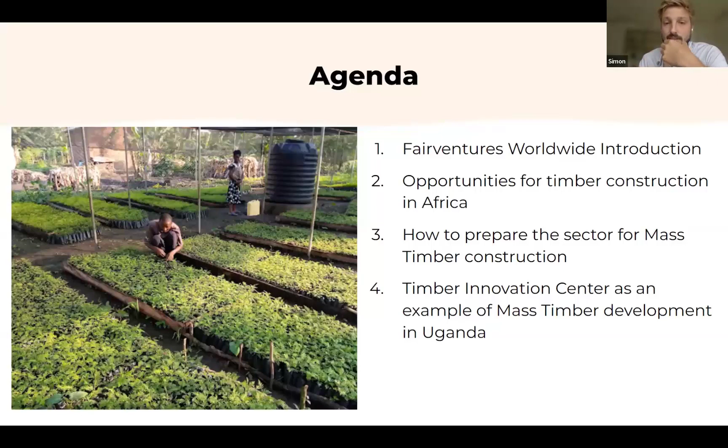I'll start with Fairventures Worldwide. We are an organization based in Germany. We are non-profit, working in reforestation projects and value chain development in Uganda and Indonesia. We have around 100 staff members across the 3 countries, and we are kind of a spin-off from Swisscontact. We have been operating since 2013.

Thank you for the introduction before. I'm Simon, the project manager for the timber value chain projects in Uganda. I'm based in Kampala. Right now I'm in Switzerland for leave, but I will be back in East Africa in about 2 weeks.

Most of us know the opportunities for timber construction, and I don't think I have to go too much into details here, just maybe as a repetition a bit.

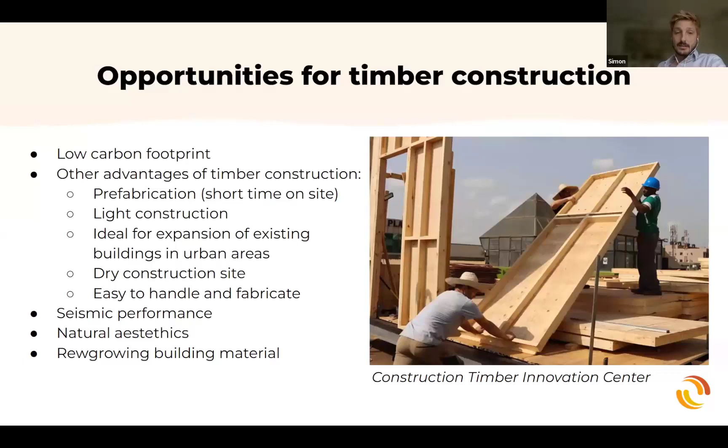We have a low carbon footprint. We have a lot of advantages like high prefabrication and short time on the construction site. It's ideal for building expansions in urban areas. We don't have water on the construction site, it's dry, and it's a material that's very easy to handle and fabricate on site. We have good seismic performance, which is also a big benefit. The natural aesthetics can be a benefit, and of course it's a regrowing building material, which is one of the most important parts of the benefits of timber construction.

What does that mean in the African context? As Hans already mentioned before, we have a lot of sustainably managed forests in Africa. I'm more focused on the East African region, but I'm sure it's basically similar in Western regions too. Timber construction has big potential for the economic growth and development of a region or country.

It's an advantage when we can source building materials locally, and we don't have to import expensive steel beams or concrete or cement from far away, from abroad, with high transportation costs. It would be good to source it as locally as possible.

Timber can also be a material for affordable building solutions, not only but definitely a part of it, and can also help address the high urbanization and population growth we have in the region, and the lack of housing we will face in the next couple of years.

When we use timber more in construction, the value of the timber will automatically increase, especially when it comes to high value products like mass timber products such as glulam or CLT. We can add value, which makes it more interesting for tree growers to plant more trees, which is also a big advantage. Africa, in general, has a big potential for global exports as well, whether as sawn timber or as a mass timber product, it has big potential for export to the global world.

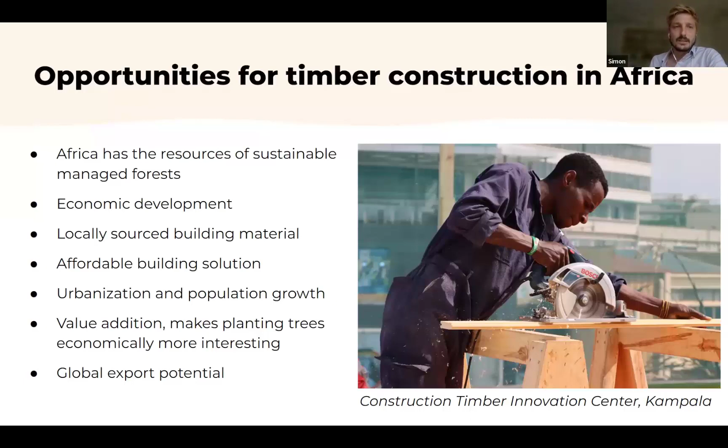As Hans already mentioned before, I think we have a lot of different steps or topics where I see we definitely have to work on, and where I see a lack of the standard we have at the moment in East Africa. One thing is we have to prepare the sector in these different topics.

We have to have timber from sustainable forests - that one I would say we can guarantee. Then we have to have quality assurance, which is a very important topic, because without good quality timber we will never produce any mass timber products. And then, of course, it needs the industry, it needs the production facilities for products like glulam or CLT locally. And the most important part, which Hans also mentioned before, is standards and norms.

We need to have national or regional regulations and standards for the different steps: for the sawmills to grade and sort the timber correctly, for the production lines, and also for the architects and engineers who are designing and calculating, dimensioning the buildings. They need standards which are accepted by the authorities and the government to build with timber.

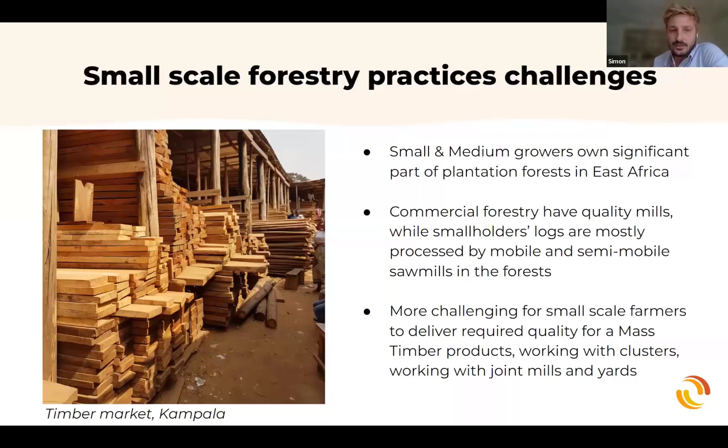To create or produce a proper raw material for mass timber products. But this can also be solved with clusters or joint mills where the smallholder farmers can access and join forces to increase the quality of the timber from smallholder farmers.

Then we have to plant the right species, and there we have criteria from the forestry perspective - in our case from the farmers, what they want - and criteria from the demand side, which would be the industry for mass timber products. We have to find the right species which matches both criteria best.

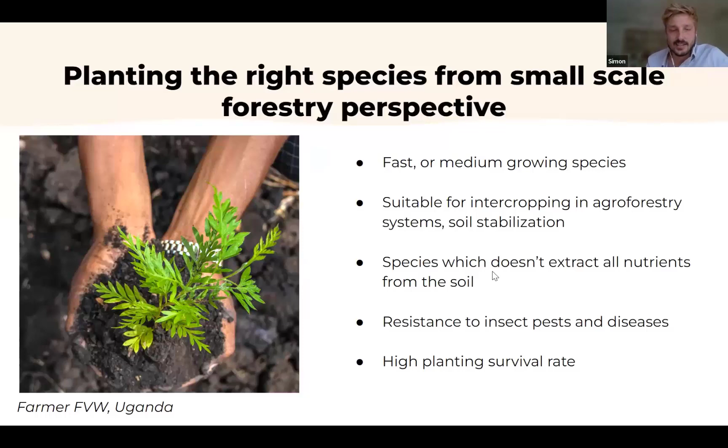The criteria from the farmers are clearly: it has to be a fast or medium growing species to have a faster return, it has to be suitable for intercropping in agroforestry systems, it shouldn't extract all the nutrients from the soil, and it has to be resistant to diseases and pests, with a high survival rate ideally.

And when we look at the off-taker, the demand side from mass timber production, that would definitely be a timber with high mechanical and physical properties - easy to manufacture, like doing the finger joints, good adhesion with the glue on the surface - and good biological and chemical properties, that it's not sensitive to fungi and termites.

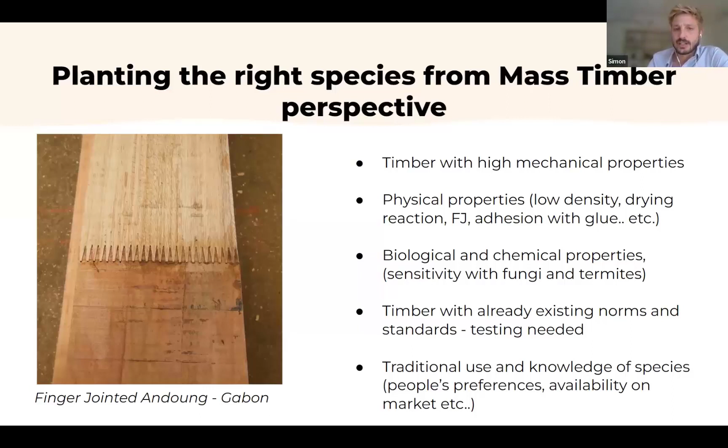And then it's also about the standards. Is that timber already standardized? Do sorting and grading criteria exist for that species? And how is the building code with this specific species? That's quite important, and also the traditional use and knowledge in the population. These are factors required, or that the off-taker of mass timber production would ask for, to get a good timber for producing a product.

Now I would like to dive a bit into the quality. We have heard about that as well. We have to increase the quality of the timber to produce mass timber products. It needs to be kiln dried, sorted and graded according to a standard, so that we can finally design the beams or the panels or whatever, dimensioning it according to an accepted building code.

We have to start with finger jointing, to make longer pieces, to cut out timber defects, to joint it together again, to make longer and straight pieces. And we have to do testing of the timber to get the right values. We cannot just take pine building values from South Africa and use them in Nigeria or Uganda. It has to be tested with the local circumstances, the environment, the climate conditions, the growing conditions, and so on.

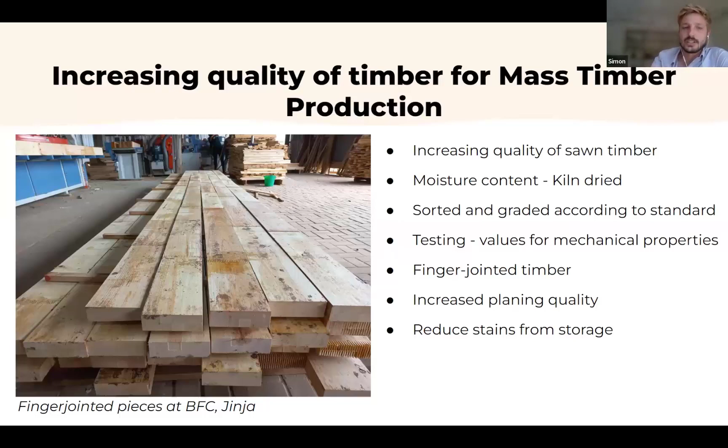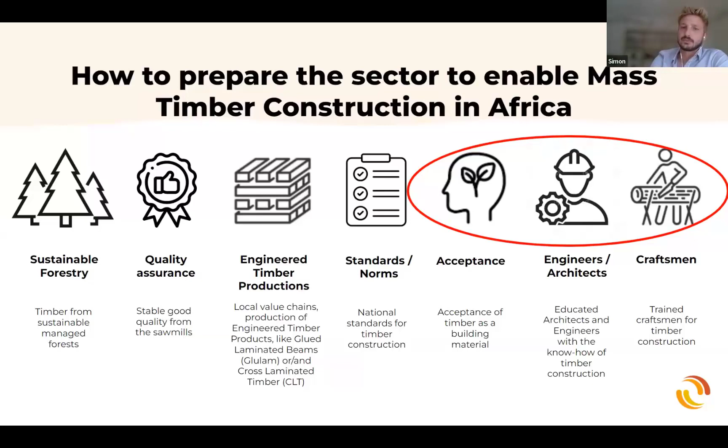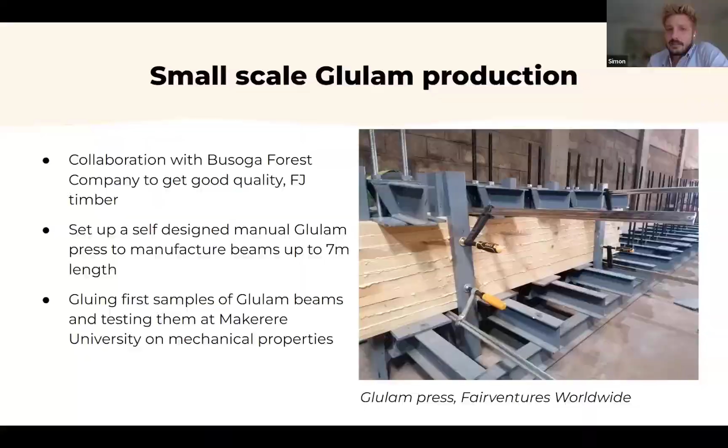We were collaborating with Hans, with Busoga Forest Company in Uganda, to develop a first simple small-scale glulam press, very simple and manual. We are able to glue-lam beams up to 7 meters with that press. We tested different glues, different ways to press it, and tested them at Makerere University in Kampala for the mechanical properties, to see the strength of these beams. This is a beam glued for the building, 7 meters long, around 500 millimeters in height.

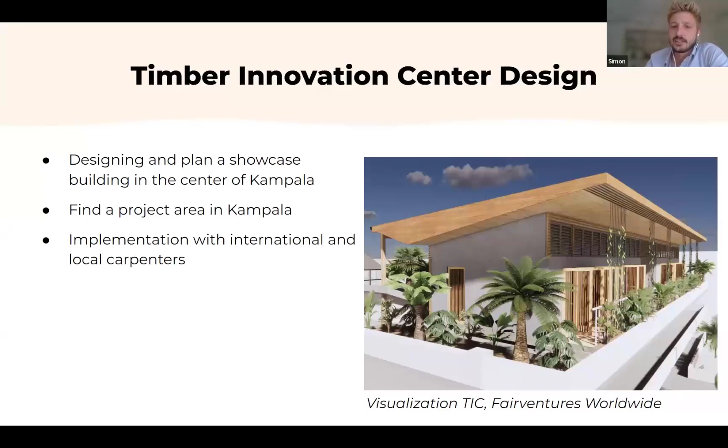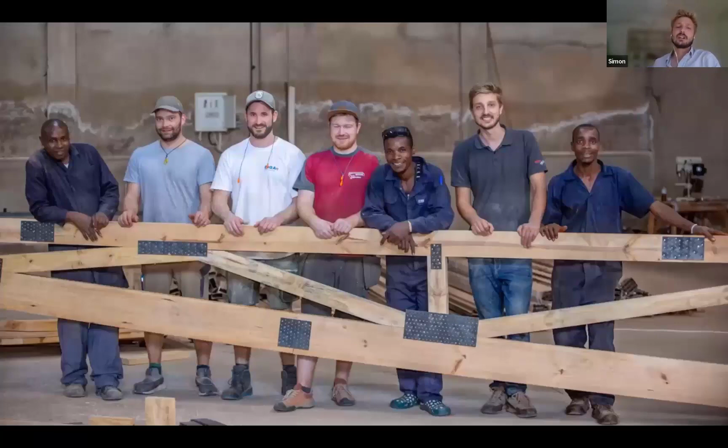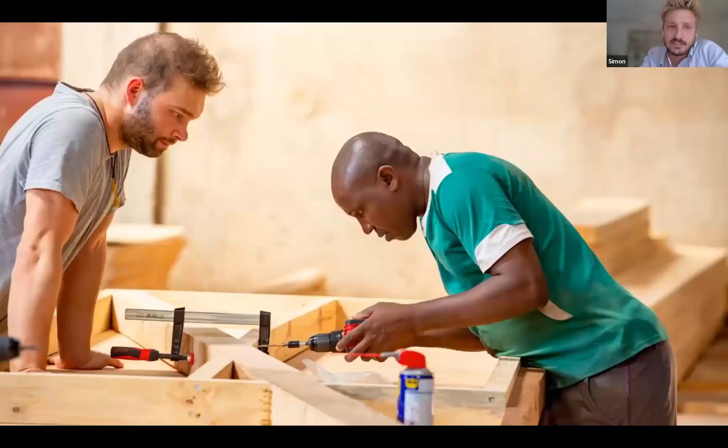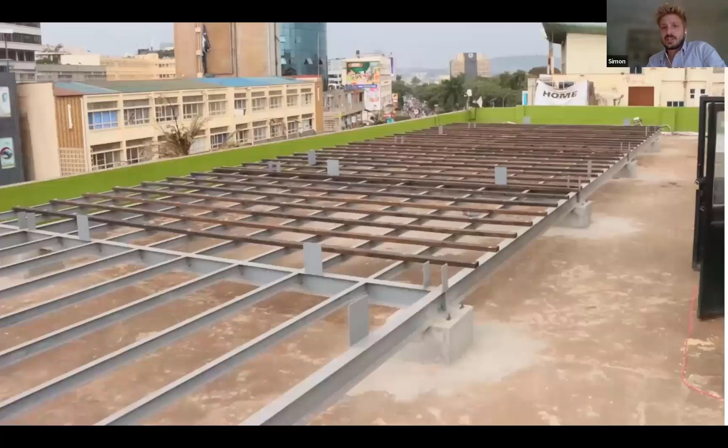We worked with international and local carpenters, did some trainings in carpentry. That was the prefabrication of the wall elements and roof trusses, all prefabricated in a factory close to Kampala - these were the wall elements, roof trusses, and that's the whole after prefabrication. We started with a steel frame - that's the only steel in the building, as a foundation to connect it with the existing one. Then the timber floor.

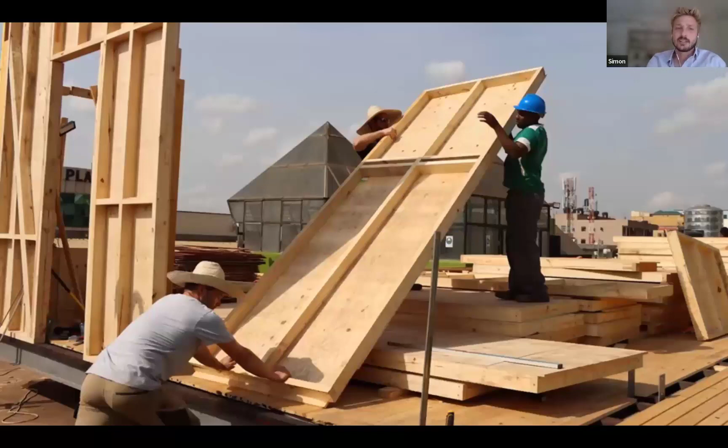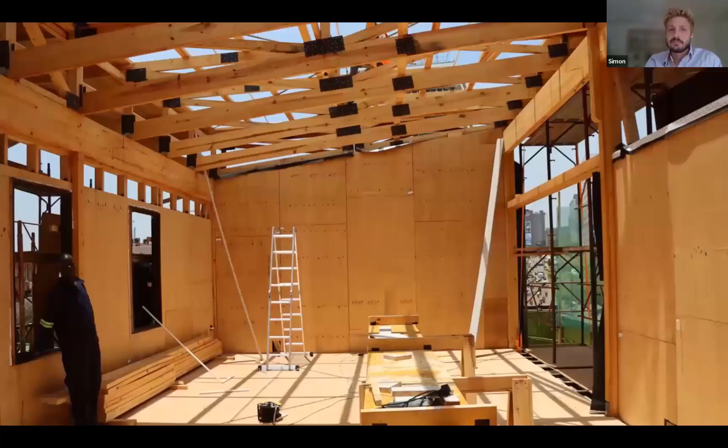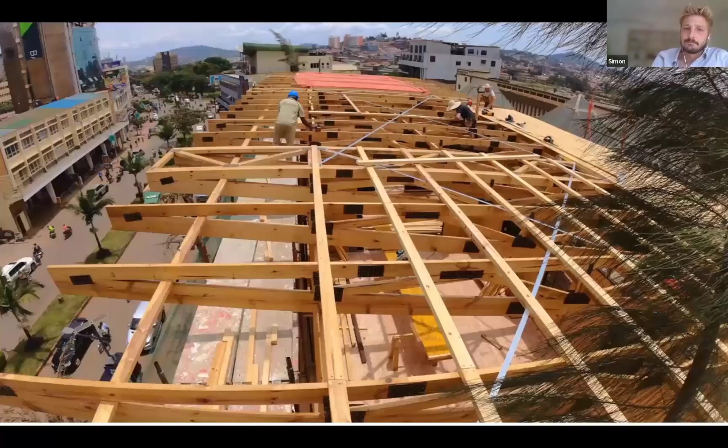And then we assembled it piece by piece with the wall elements on site. That was after a couple of weeks, and it developed quite fast. It was logistically quite stressful. These are the trusses, the inside, and these are the glulam beams, which have a span of about 6 meters - they span the whole roof without any columns below. And that's the roof, and how it looked after a month.